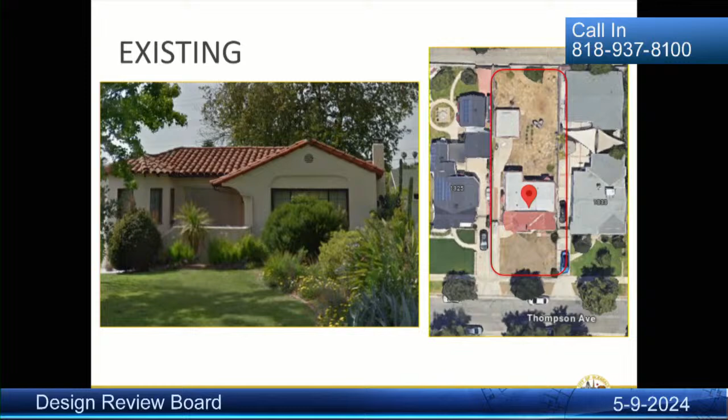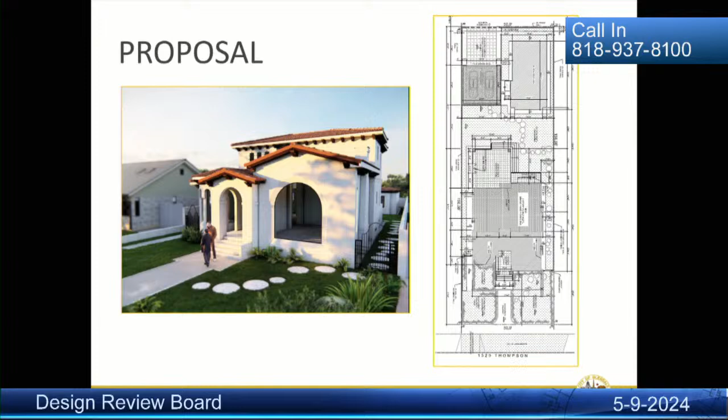Okay, the applicant is proposing a new two-story, 2,348 square foot single-family dwelling with an underground basement, a detached two-car garage that will be accessible from the alley, and a new detached 675 square foot accessory dwelling unit. The house is designed in a Spanish Mediterranean style, and the ADU and the garage are accessed via the alley at the rear.

Taking a look at the first floor plan, it features a dining room and living room, both facing the street, along with a kitchen and a bedroom and a bathroom. There's also a 432 square foot outdoor patio with kitchen features at the rear of the house.

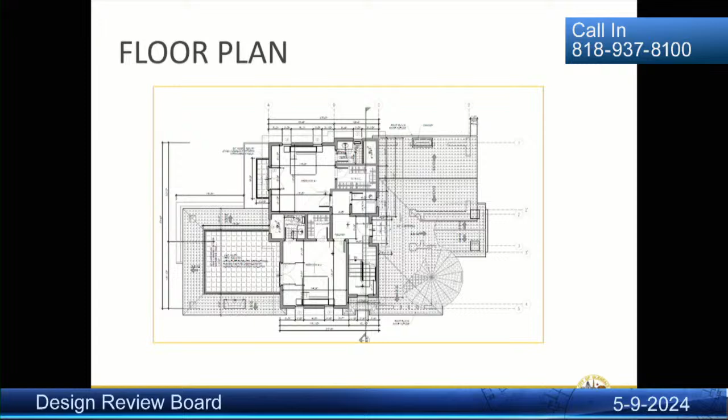And then on the upstairs floor plan, there are 2 bedrooms, 2 bathrooms, and a laundry room. There's also a 247 square foot open balcony off bedroom number 2 that's addressed in the conditions of approval. Staff believes we can reduce the size of this balcony to help with reducing the overall mass of the project.

All 4 elevations are shown on this slide. The design and detailing are consistent with Spanish and Mediterranean architectural styles. They have a low-pitched clay tile roof, rounded windows, and wood corbels. The project, including the ADU and the garage, feature white-colored smooth stucco and a red clay tile roof in keeping with the architectural style. The overall massing of the primary house could be reduced.

We believe that by pushing in the second story on the sides and at the rear, we could reduce the massing. While the second story is appropriately pushed back from the front, you can kind of see on the facades here, it's sort of massive from the sides. The mass and scale could also be improved by redesigning the front facade to reduce the amount of dominant architectural features. The front currently has a curved window, an entryway gable, and a rounded window that sort of overwhelm the focal points, and staff has included a recommendation to address this.

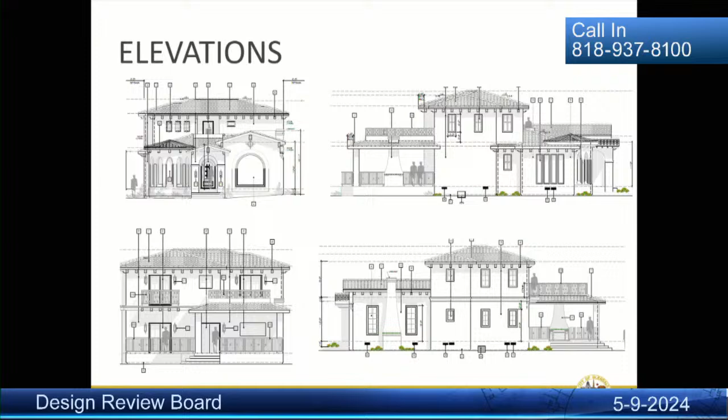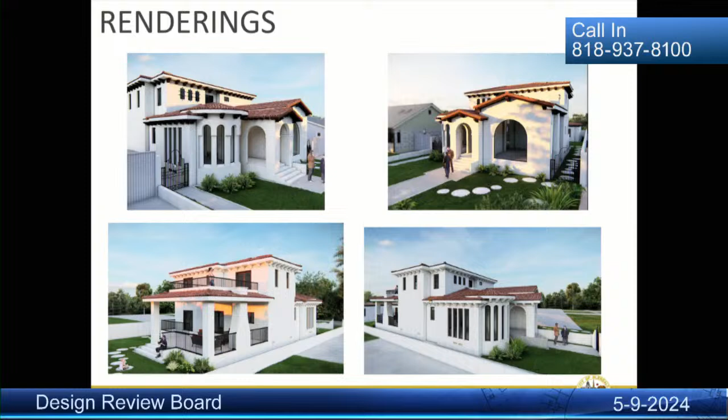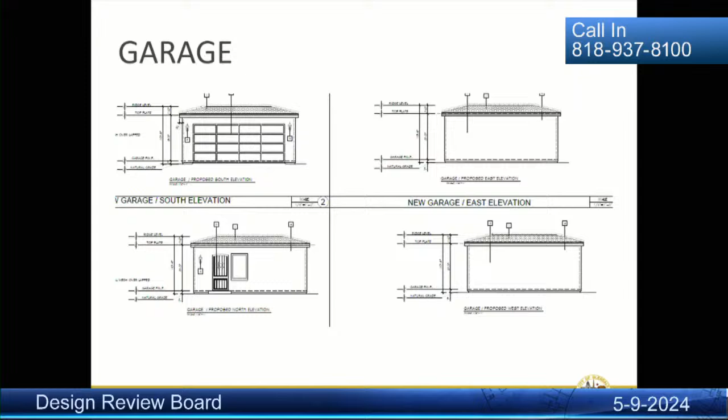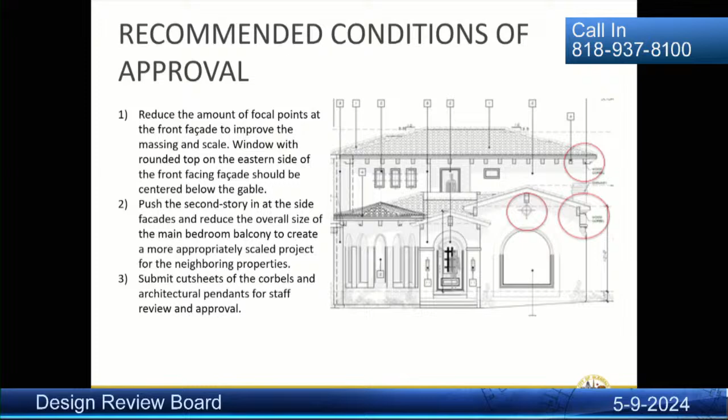Staff is recommending approval with a few conditions. One would be to reduce the amount of focal points at the front facade to improve the massing and the scale. The window with the rounded top on the eastern side of the front-facing facade should be centered below the gable, which it looks like it is now, but in a previous version it was not. And number 2, push the second story in at the sides and reduce the overall size of the second story bedroom balcony to create a more appropriately scaled project for the neighborhood. And 3, to submit cut sheets of the corbels and any architectural pendants for staff review and approval. I did not receive any public comments, and that concludes my presentation.

Very good. Thank you, Ms. Kuffel. Okay, any questions for staff? Yeah, go ahead. Thank you, Mr. Chair. In regards to the basement, what's the mindset behind it? How did it come about? It's always been a part of their proposal, and my understanding was just for storage, added storage. Is it part of the existing conditions, or this is new? Does the house basically now have a basement? I don't know that the house now has a basement. I don't believe it does. Okay, we'll ask the applicant. Okay. Any other questions?

Okay. All right, so we will open the public hearing. First up is the applicant, Arthur Israelian. Please state your name for the record. Arthur Israelian. Good evening. This is our company project. When I took this job, I took more responsibility for the project because I'm living in that area, 2 minutes walking. Every day I'm walking over there. The neighbors know me, and I believe I cannot fail with this project.

We tried to achieve with this design to complete the needs of my client. They like the Spanish style. They asked for the design in the Spanish style. And in our neighborhood, there are a lot of Spanish houses in El Miradero. On the next street, there's a couple of nice houses. I'm walking every morning in that area, checking whatever we have in the city. The project, I believe, became nice. There's some comments from the staff. We can work a little bit more, but overall, I believe we achieved whatever my client asked and whatever our goal was.

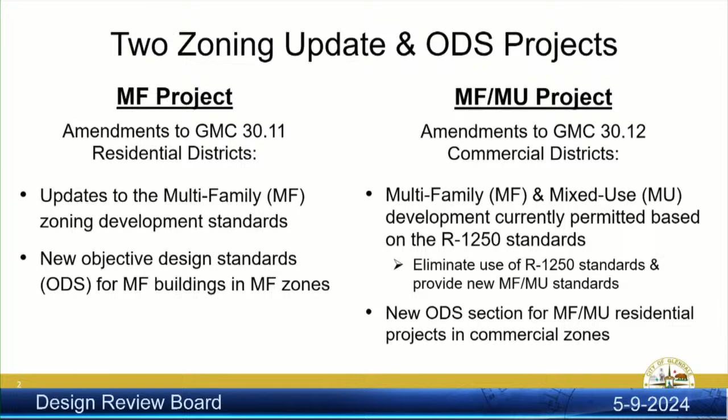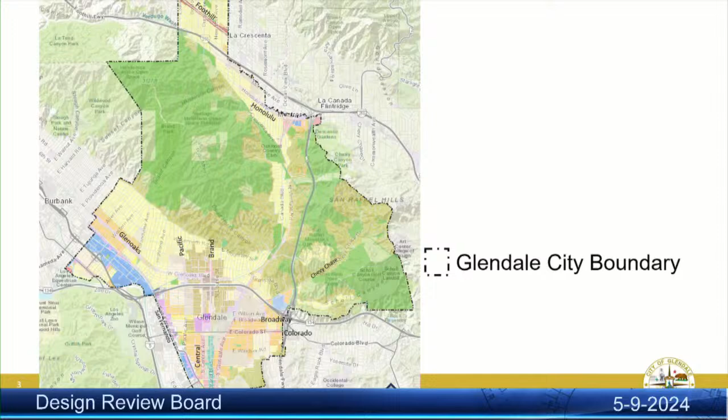The slide before you provides context where the new standards would apply. This is the map of the city showing the multifamily residential neighborhoods in gold and the commercial zones along commercial corridors and centers in red. These zones we're discussing this evening are located along major streets such as Colorado, Broadway, Glendale Avenue, South Central Avenue, and parts of Glenoaks and Foothill.

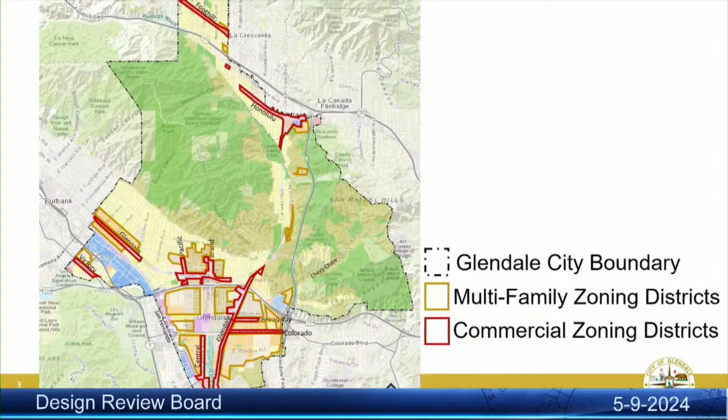The multifamily residential projects, new site planning and massing and scale concepts were presented to City Council in November, stakeholders at the end of the year as well. And the actual draft code language for the multifamily project was presented to the DRB back in February. And then we had a meeting with the local architects group shortly thereafter for their comments as well, as directed

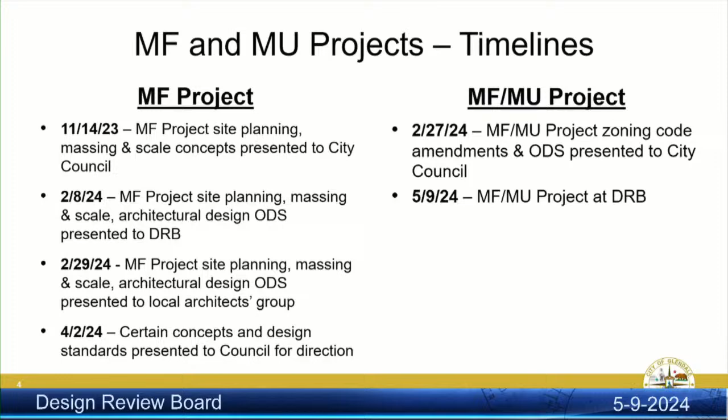by the DRB. Now, the mixed-use project, the MFMU project, the proposed code amendments were presented to council at the end of February, and comments and concerns raised by the DRB and the architects group on the multifamily project were presented to city council in early April. So that is when council provided additional direction that applies to both projects. And today's presentation focuses on the commercial districts.

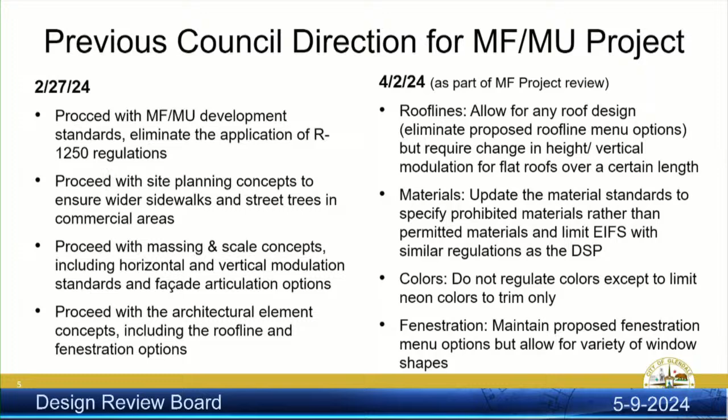fenestration. So council's focused review of the certain objective design standards in early April resulted in direction for the mixed-use project in terms of roof lines, materials, colors, and fenestration, and staff will be discussing these topics in great detail later in the presentation. So we'll leave that for now.

As noted also in the multifamily residential project, these code amendments were directed as part of the SB2 grant program, and staff has been working with Crandall Arambula to update the commercial zoning standards, and this would be to streamline residential and mixed-use development in commercial corridors and centers. Note that Crandall Arambula also prepared many of the same concepts and diagrams being presented to you today.

Okay, these updates are vital since current commercial standards only allow for multifamily residential development in commercial zones based on the existing R1250 high-density standards. These standards, the R1250 standards, are intended for traditional multifamily residential neighborhoods. They've proven to be too stringent and restricted residential and mixed-use development in commercial zones.

The very few mixed-use projects that we have had developed over the last decades, and there are very few of them, have required numerous variances from the R1250 standards or have had various concessions and waivers for those that featured affordable units and density bonuses. Proposed updates would eliminate the application of these R1250 standards, provide new standards, and obviously incorporate objective design standards.

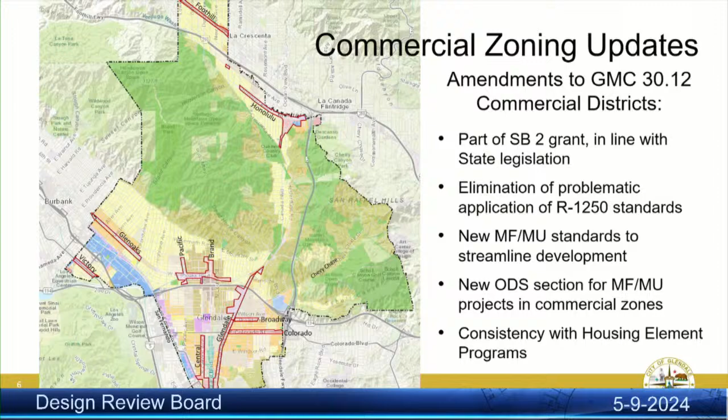And this work is part of the community development's efforts to create an improved entitlement and streamlined review process. So this would increase the certainty of multifamily and mixed-use development in commercial areas. We'd be removing the current CUP requirements and standards that require variances and ensure livability and design compatibility in commercial areas as well. Last but not least, the updates are in line with recent state legislation requiring that all design standards be objective, measurable, quantifiable, and it also fulfills certain housing element programs as highlighted in detail in your staff report.

So this slide addresses the first half of the project, which would be updates to the development standards. Currently, multifamily projects, and as you know, multifamily residential portions of mixed-use projects have to comply with all of the R1250 standards. So no changes are being proposed in terms of density. It's going to remain at 43 units to the acre maximum for lots greater than 90 feet.

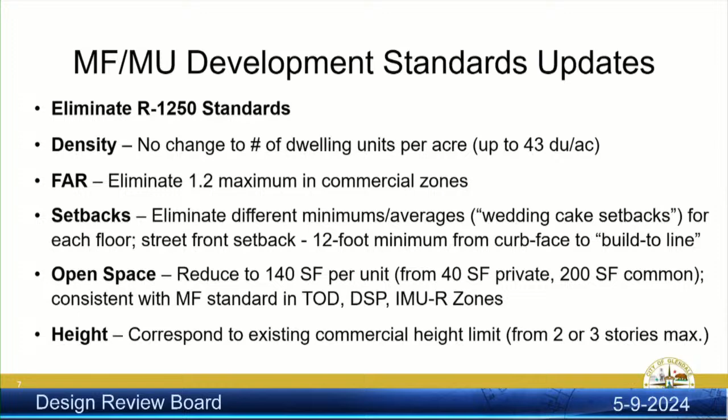Other standards to be updated to be more in line with typical mixed-use developments, such as lot coverage, setbacks, and open space. And meanwhile, the current R1250 height limit right now, 2 stories or 3 stories, depending on the lot width, that is being eliminated, and the height limit would then fall to what is the current height limit in the applicable commercial zone. So whatever the height limit is that you would be allowed for any commercial project would be the height limit that would be allowed for a mixed-use project as well. With that, I'd like to turn the PowerPoint presentation over to Teresa to continue with the actual objective design standards.

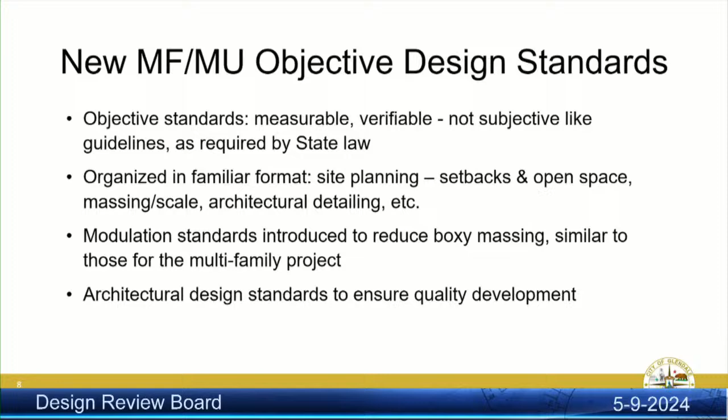Thank you, Vilia. So this project does have a few overarching goals. Vilia touched on the recent state legislation that requires that any new development standards be objective, quantifiable, and measurable. So that is the first goal with this project. We also sought to ensure that the way the ordinance was structured was going to be something that was within a familiar format. So the way it's been organized is to address site planning first, and then moving on to massing and scale, and then finally touching on the architectural elements. The new objective design standards are drafted to ensure quality development that's articulated and not overly boxy by requiring modulation both horizontally and vertically, as well as articulated facade elevations.

So moving right into those site planning standards, the site planning updates really focus on the elimination of those R1250 residential standards. So while the R1250 does require a minimum 20-foot landscaped front setback, there are essentially no front setback requirements in many of the commercial zones, and projects can be built basically at the front property line. So in some cases, that would be as close as 7 feet to the curb face.

The new standards are actually focusing more on the pedestrian realm, and this is consistent with the Tropico TOD standards that were approved last year. So the new setback would actually be a 12-foot dimension from the curb face to the wall face to create a nice pedestrian realm. This would allow for accessibility and street trees as well. That 12-foot standard would apply at the ground floor. Stories above the ground floor could potentially go up to a 10-foot minimum setback from curb face or to the property line, whichever of the two is closer to the street.

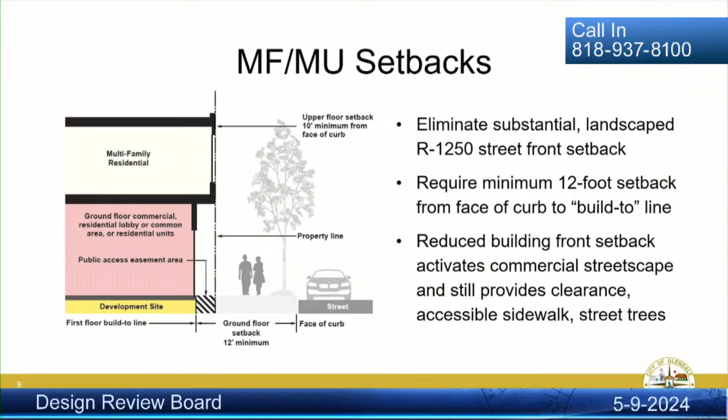Then moving on to our massing and scale section, you may recall the horizontal and vertical modulation concepts that we discussed in the multifamily project. These standards aim to reduce the bulk of buildings, avoid massive boxy structures, and provide transitions in height between new and existing buildings. Horizontal modulation is going to be a new definition. It's defined as variations across the facade, such as recesses to break up the horizontality of a building into defined building segments. Whereas vertical modulation refers to variations in heights, which could be achieved by creating a step back of the upper stories of a building.

The vertical modulation standards require greater transitions in height when a project is adjacent to a residential zone or is located on a sloped lot. Massing and scale standards also include facade articulation regulations, which introduce architectural elements that help to break down large segments of building facades into smaller scale segments. And the facade articulation standards feature a new menu of options, which we'll go over later in the presentation.

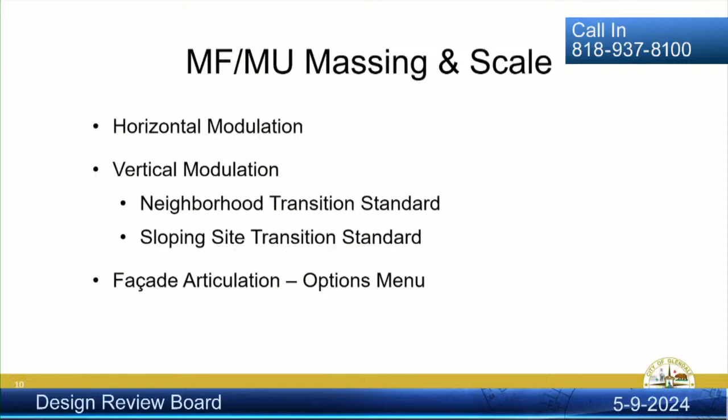So here we have our horizontal modulation. The horizontal modulation concepts require that building facades be broken into segments. Here in the commercial zones, any facade that is on an elevation that's greater than 90 feet in length would be required to have a recess so that it would be broken into 3 segments. The recess segment would be required to be a minimum of 40 feet wide and a maximum of 60 feet wide and have a minimum depth dimension of at least 10 feet.

The horizontal recessed modulated facade is required to go at least from the second story to the top of the building. It is allowed but not required at the ground floor as well. We are encouraging it at the ground floor, but in a mixed-use project with a commercial or retail use at the ground floor it may not always be appropriate.

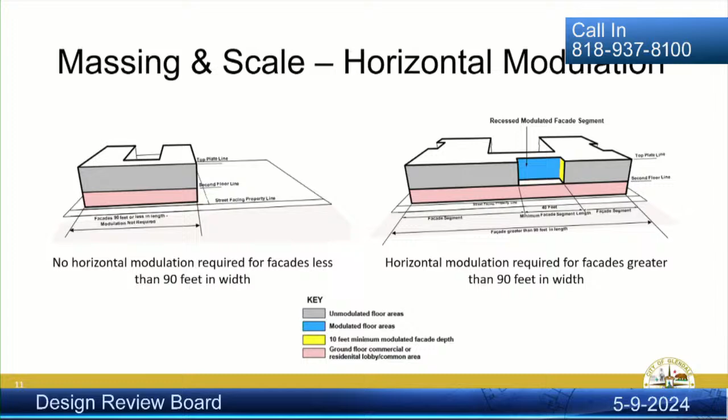Vertical modulation provides that height transition. We can see in this graphic it's stepping back. The modulation reduces the top of the building. It also reduces shade and shadow onto adjacent properties and public sidewalks. The vertical modulation standards would apply when a multifamily or mixed-use development is greater than 45 feet in height. At that point, the top floors would then have to be set back 10 feet from the front elevation and 5 feet from all of the interior elevations.

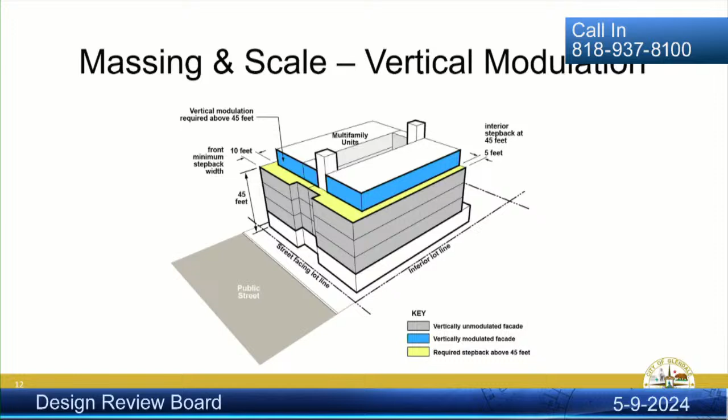And then when a project does abut a residentially zoned property, additional setbacks and stepbacks apply. So a 10-foot setback at the ground floor would be applicable, and then above the second story, an additional 10 feet with a step back.

We also are going to be... Quick question. Yes. Residentially zoned property, would that be including single-family zones? Yes. So it doesn't matter whether it's multifamily or single-family, it's just the one 10-foot setback? Correct. Okay, because some of these C zones do abut single-family neighborhoods, yes? Yes, they do. Sorry, just 1 second. Oh, okay. Vilia is going to be verifying the exact wording in the ordinance, make sure that that's accurate information, and we'll get back to that.

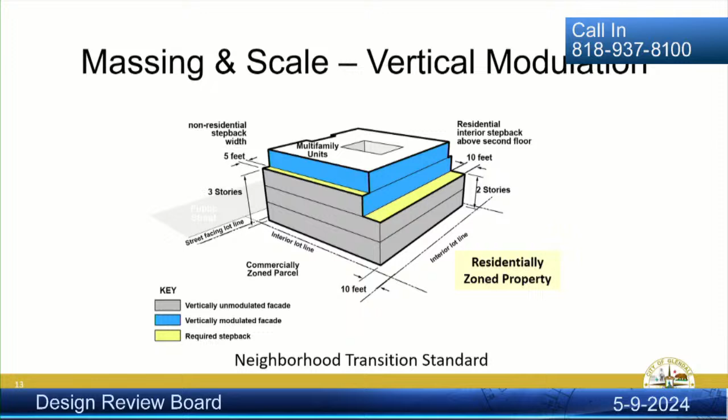Also want to point out that there will be additional standards, transition standards for sloped properties, like you might find along Foothill. We don't have a graphic to demonstrate that just yet, as that is getting lined out. So moving on to our massing and articulation modulation. The objective design standards provide a variety of facade articulation options.

These are similar to the options that you saw with the multifamily project in February. New projects will be required to incorporate at least one of these facade articulation options onto each elevation of the project. Architects and designers can choose from these options. They should be adding visual interest and help to reduce the massing of the building. And we're going to go over each of these options with some real-world examples. We also have a couple of additional options that have been generated since our meeting in February, and so we'll be showing some examples of those as well.

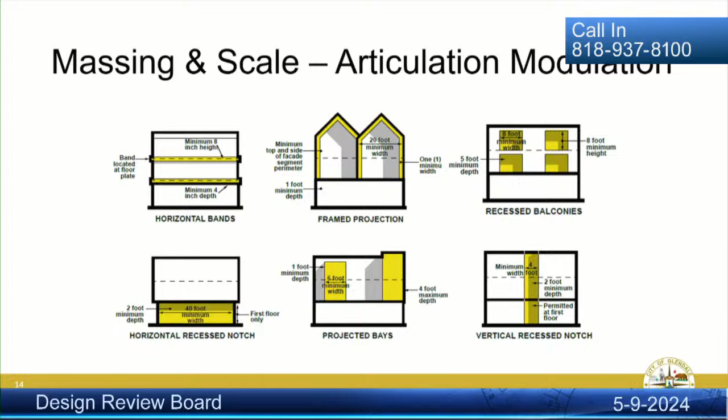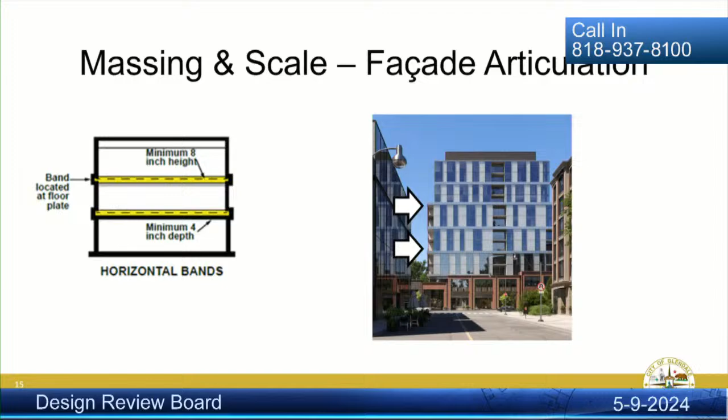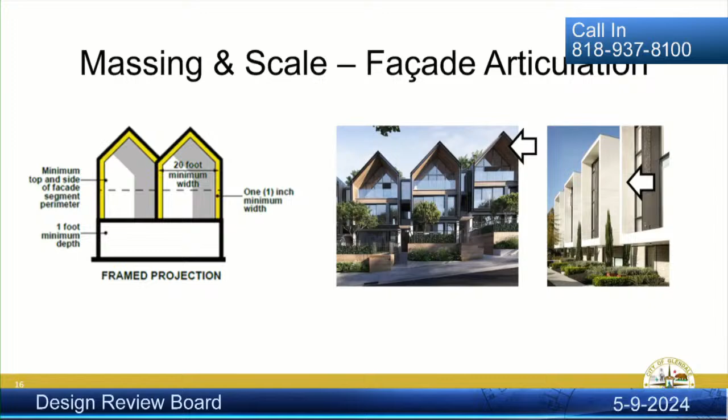So first, we have our horizontal bands. Horizontal bands help define the floor plates of a building and accentuate horizontality of a building. Then we have our framed projections. We can see a variety of shapes in these images here. Framed projections would essentially be framing the top and sides of a building facade to break it into more rhythmic segments.

And we have recessed balconies, which provide some depth to those building facades. Now, the consultant specified that recessed balconies can be used as an articulation option, but we also have a provision in the new ordinance that would allow for balconies that are not one of those options that could actually project from the building face, as long as it's not projecting over any public right-of-way area.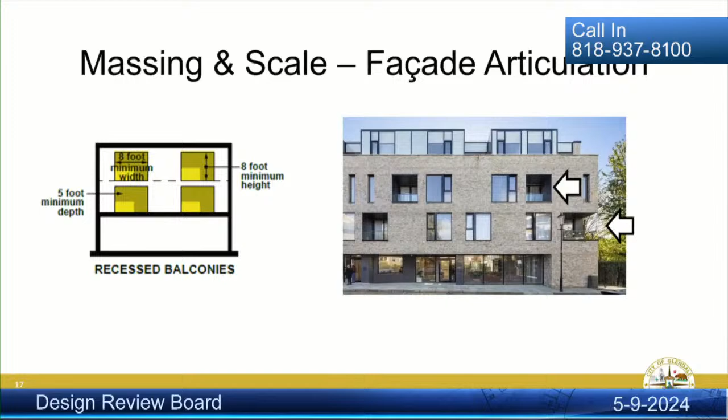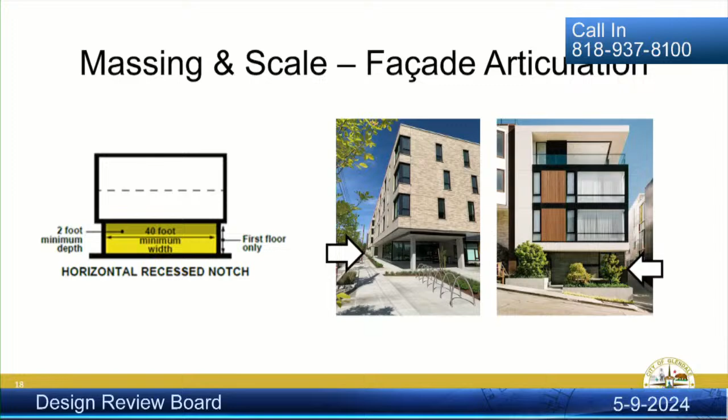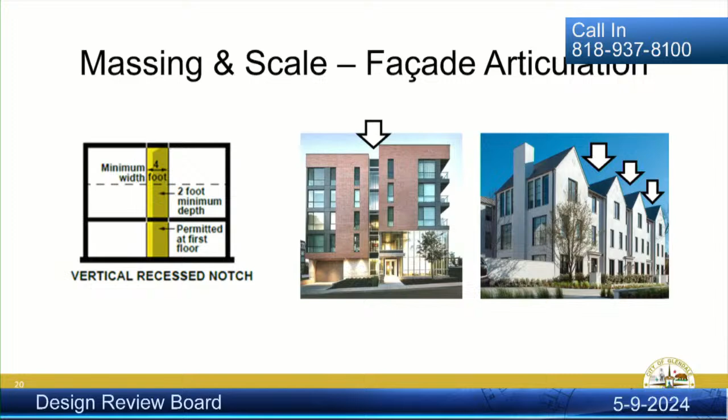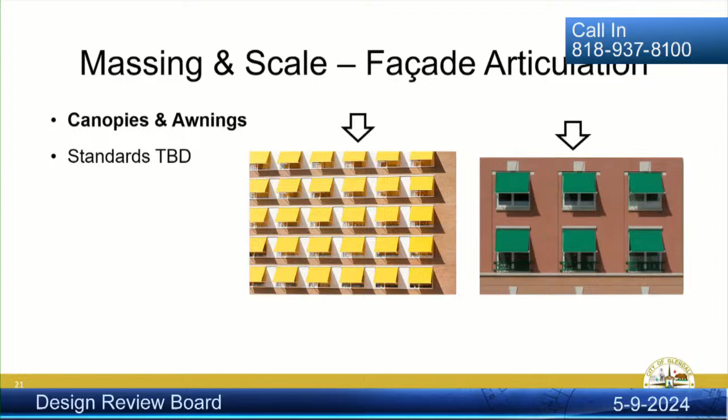Vertical recess notch features a recess that goes through all of the stories of the building and provides kind of a break across the building elevation. Vertical recess notches are not required at the first floor, but they are permitted at the first floor. And some of the graphics to be drafted would include canopies and awnings on the upper stories of a multifamily or residential mixed-use building. And finally, we also will be adding graphics for brise soleil, which would add an interesting geometry to the building facades as well as provide passive cooling to the buildings.

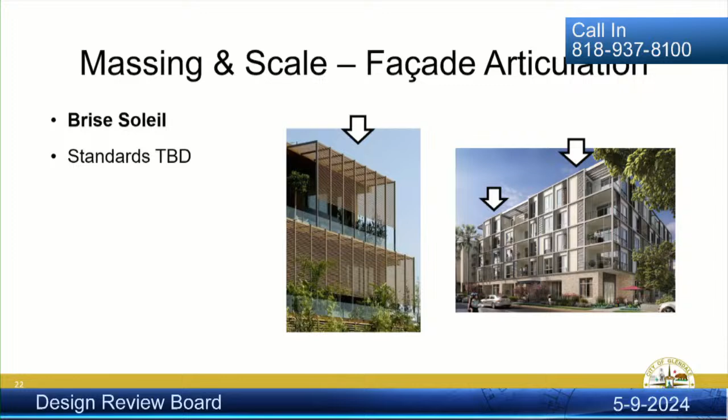Another main subsection of the objective design standards is architectural elements. This includes standards related to vents, gutters, downspouts, as well as materials and colors of facades, roof forms, and balconies, as well as fenestration options, canopies, things of that nature. DRB and a group of local architects provided a lot of input on some of these particular items. And we presented that conversation to City Council and did get some feedback from Council, which is noted here in red.

So particularly with the primary facade, the materials list has been updated so that it lists only prohibited materials rather than permitted materials. It also has updated the limits on EIFS to be consistent with those found in our downtown specific plan. The direction from council was not to regulate color, with the exception of limiting neon or fluorescent paint colors solely to trim elements on a building.

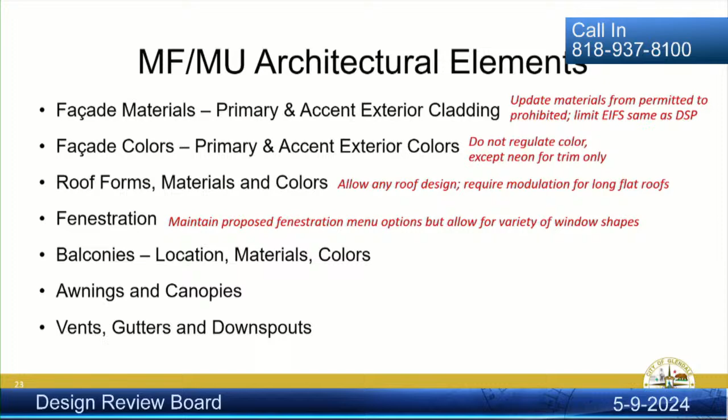Council also concurred with DRB and with local architects to not restrain roof design. And so the ordinances have been amended to allow for any roof design. However, there would still be a vertical modulation requirement for long, flat roofs. And finally, again, concurring with the recommendations of DRB and the local architects group, the fenestration menus will allow for any type of window shape and not be restricted to just rectangular window shapes.

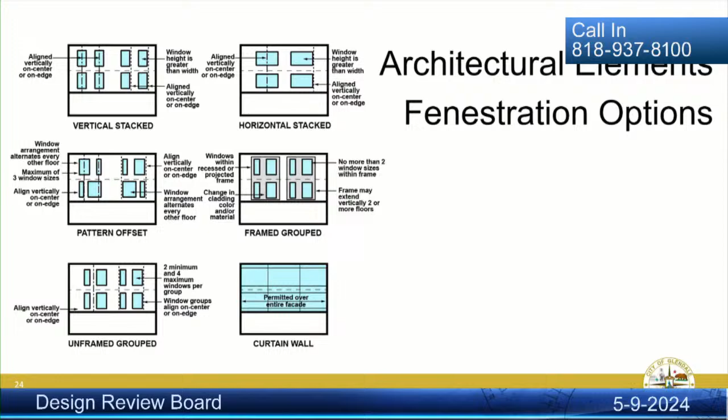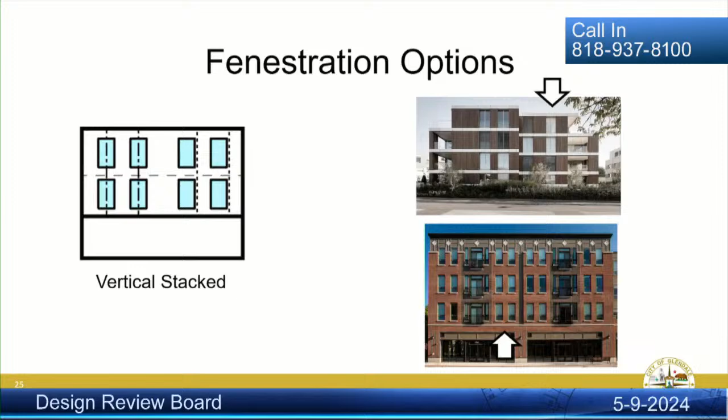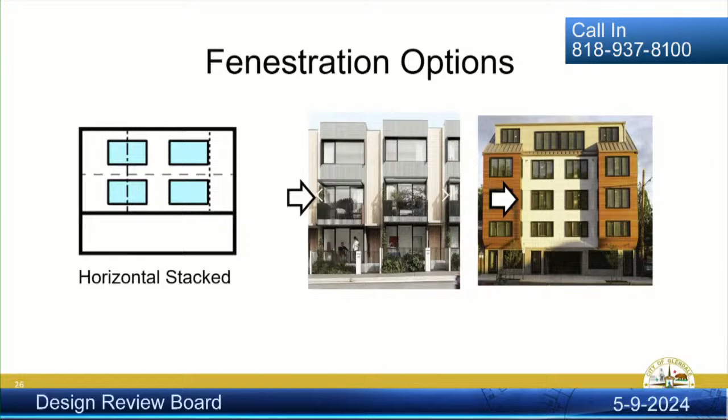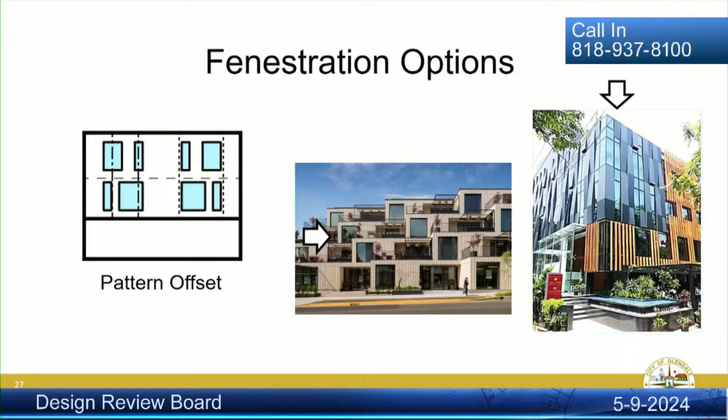And so looking right at those fenestration options, we have the vertical stacked option, which is when the window height is greater than the width. Those types of windows could be aligned either on center or at an edge. Horizontal stacked is basically when the window is wider than it is tall, and the alignment would be very similar, either on center or on an edge. We have pattern offset option, which would allow for window arrangement to alternate rhythmically every other floor of the building. And then the curtain wall features a wall of windows that can span multiple stories.

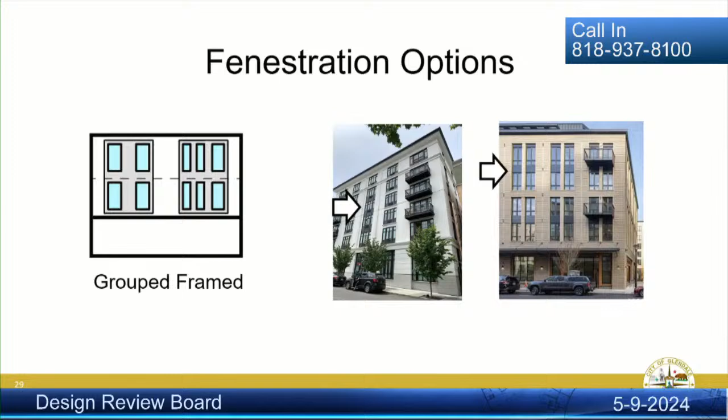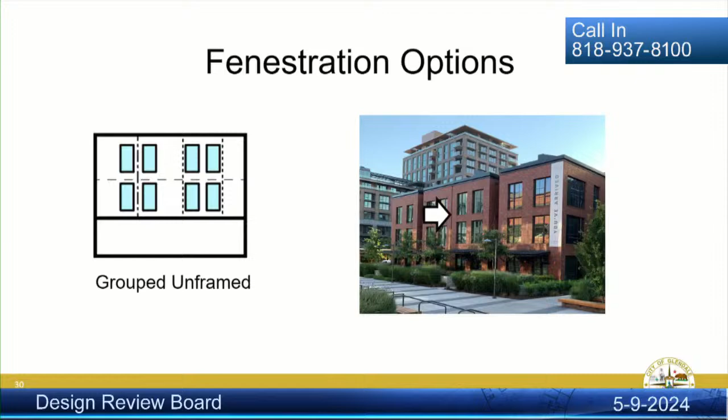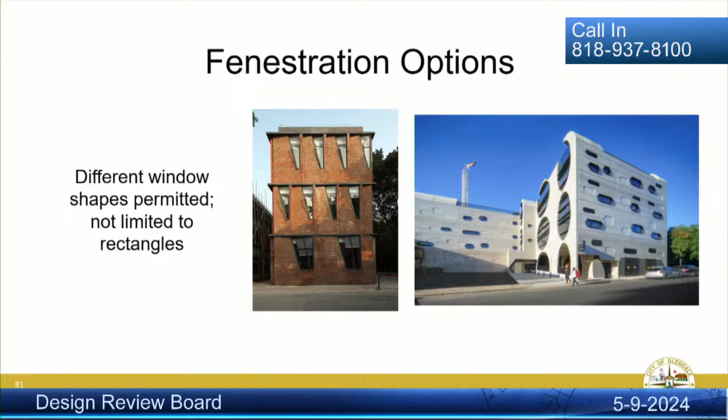Another fenestration option is the grouped framed window design, in which windows are kind of set within a frame that would extend over more than one floor. Oftentimes the frame would be offset from the building and then have a distinguishing feature such as a change in material or a change in color. And then grouped unframed features a grouping of windows that are not set within a frame. And just to note, those different window shapes will be permitted and will not be limited to rectangles. We found some interesting options.

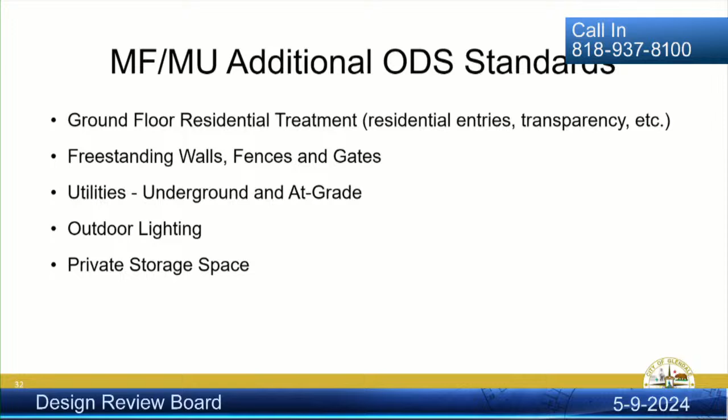Finally, the objective design standards concludes with standards that are going to be related to ground floor residential treatments, distinguishing entryways to the residential from any commercial area, as well as facade transparency at the ground floor. The regulations also touch upon freestanding walls, fences, and gates, outdoor utility location, outdoor lighting, and residential private storage space. And Villia is going to take it from here.

So, we have come to that part of the presentation where we are looking to the DRB to provide feedback on a number of these concepts and development standards. The first being the actual development standards themselves, with the elimination of the R1250 standards. Staff is proposing to eliminate the 1.2 FAR. And again, when we refer to FAR, we're referring to the floor area ratio.

This would be essentially the total amount of floor area divided by the lot square footage. So for instance, a 1.2 FAR would essentially be if you had a full 50 by 150 lot, 7,500 square feet, you'd probably be getting around a 9,000 square foot building, roughly arranged on maybe one and a half stories, if that is possible.

We feel that elimination of the floor area would get these mixed-use projects to a level of density that is permitted by right, and it would still be consistent with the building envelope that would be allowed for any other type of commercial building. So you're not changing the massing, you're just basically allowing for development potential to be increased, what you would normally see, that is.

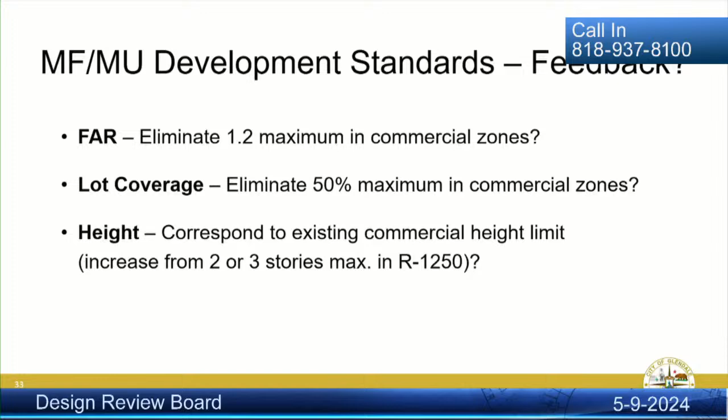Lot coverage, right now, R1250 is at a maximum 50% of your lot. This would be pretty standard for traditional multifamily residential neighborhoods that have great landscaped front yards, landscaped side yards, open spaces at the rear. In this case, because this is a dense urban environment to begin with, and these are located along commercial streets that have active transportation available, people are walking and whatnot, in an urban environment you're not seeing a 50% lot coverage in this type of context.

And so staff is proposing to eliminate that. It is up to the board and your feedback whether to do so, or instead perhaps limit it to a specific percentage that is greater than 50%. And last but not least, staff is recommending that height be allowed to go to what is permitted for any other type of development in the commercial zone.

So for instance, looking at the C1, and this was part of the proposed ordinance included in your staff report on page 7, the maximum height in a C1 zone is 25 feet. That is not changing. So any type of residential or mixed-use residential project in the C1 zone would remain at 25 feet.

C2, that goes up depending on which district you're located in, whether it's 35 feet or 45 feet. C3 is the more intensive commercial zone, so that goes up to 50 feet in District 1, 65 in District 2, et cetera. So again, we're just proposing to have it consistent with what is permitted by right for commercial buildings.

Next, and I'm not sure if you'd like us to pause here to get your feedback now, or if you'd like us to run through the rest of the feedback slides and then pause for your feedback in general. I do know that we have some public comments as well, so if you'd like to hear that prior to providing your feedback, that would be up to the board. So how would you wish? Yeah, I think we can all make notes, but since we have callers, we should go through the presentation, allow them to give comments, and then we can weigh in. Great.

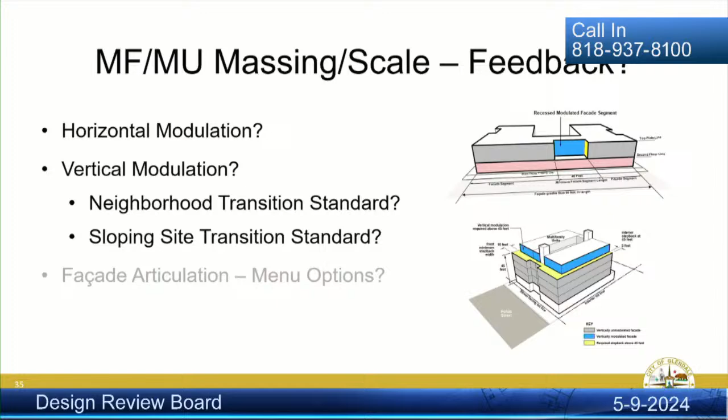Sorry, a question about the modulation. Is it limited only to the street-facing facade, or when it's over 90, if it's interior, it's also? Just to the street-facing facade. Okay. Correct. Just to the street-facing facade. Oh, I see, this is street facing. Yeah, but then you look at the sides, they're modulated, but if it's interior. Yeah, I know. It's hard when you show me visuals. Yes, I know, and that is the unfortunate thing, because these diagrams have not been modified. But we will finalize the diagrams for the final draft as well.

Okay. Next up would be the facade articulation, the menu options. Council directed staff to move forward with the menu options for the articulation of facade modulation. Does the DRB have any other recommendations? Do you like the brise soleil and the awning options as additions to this menu option? Do you have any other possible options that staff has not yet considered that you would like to include? This is up for feedback. Chair Pro Tem, go ahead.

By the way, I thought the imagery that staff had provided was excellent. The examples that are being depicted for the language of the windows, the banding, the balconies, everything that you're describing, which is just so hard to depict, I thought your imagery was great. We could tell you've been working on it, because that just is really amazing. So, yeah, the brise soleil and the awnings are all good features to allow, because they will be used creatively by architects.

Just so we could understand, though, I felt as though you were alluding to that these standards don't have undulation or articulation on the interior sides of a commercial development, and that's why the increased setbacks were being proposed. So am I understanding that correctly, that, let's say as depicted on page 19, this undulation and articulation is really only for the street side, but as proposed here, the same wouldn't apply on the interior setbacks, is that correct?

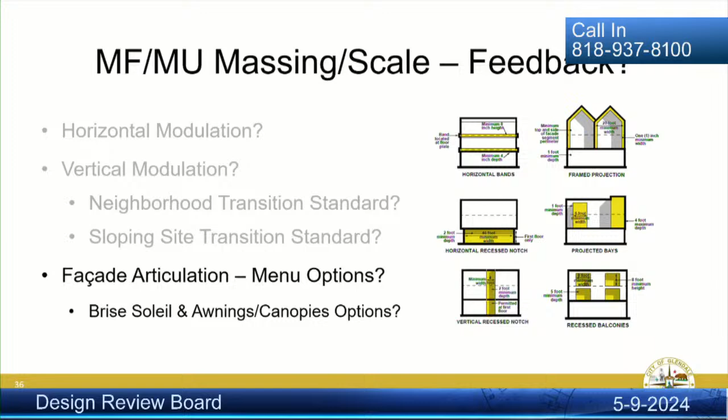Last but not least, the articulation elements. So, now these were based on council's direction at the April meeting. Fenestration: council directed staff to proceed with the fenestration options. I know that the DRB and the architects group sort of said, perhaps we don't need to regulate windows. The building code regulates egress, ingress for bedroom windows and things of that nature. Council heard that and ultimately directed staff to proceed with the menu options.

We provided images and hopefully those were sufficient to show you that there is a variety. They're not going to be limited to single rectangular windows, and so there would be options in terms of shape. Roof forms: council heard you, the DRB and the architects group. The menu options regarding the pitched and flat roofs have been eliminated for roof line. And the only requirement would be that long, elongated flat roofs over a certain length, which is yet to be determined, would have to be modulated so that you don't have just a long, flat 250-foot roof line. Yeah, makes sense.

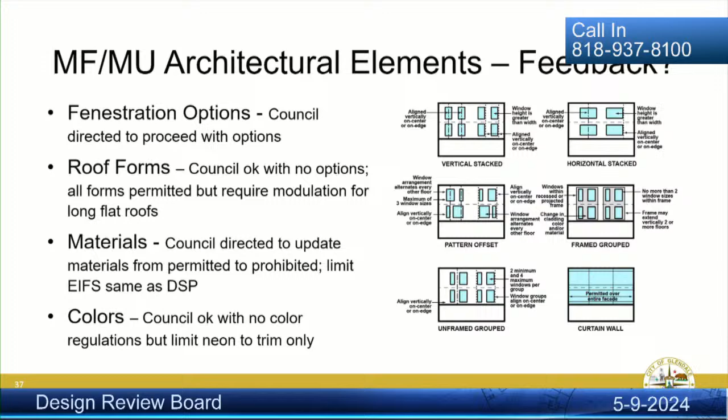I have a question, though. Yes. So as far as the common open spaces, and I know we're calling common open space something else now, but that's what I'm referring to. One of the images illustrated a reduction to 140 square feet. There was a lot of discussion with the multifamily standards as to where that should be placed, if it's going to be placed in the first 80% and whatnot. We had a lot of discussion about that with the architects group as well. Where is it being proposed to be placed here? Are there any restrictions, or could you place it anywhere you want?

So the multifamily regulations were very different because there was a new concept being proposed of the common open space amenity area, the COSA, that was breaking up the building. And because of that, the open space was sort of regulated in regards to that COSA. In this case, because this is a very urban context, there are no limitations, whether it be a balcony or a rooftop deck. This is a streetscape, urban context, and it would be consistent with other mixed-use residential projects.

So it could be 140 per unit, let's say on the roof deck, or it could be 140 square feet of private balcony per unit. It just depends. Correct, and so it would allow the maximum flexibility for the architect in terms of its open space. The only thing is there are regulations regarding balconies, if they're used as a facade articulation option, which is one of the options on the menu list.

Those have certain regulations in terms of, a portion of it has to be recessed, there's a maximum projection. So there are minor regulations regarding balconies for private open space, but otherwise there is no limitation in terms of where is it located on a lot, where is it located on a building facade. That's definitely in the right direction.

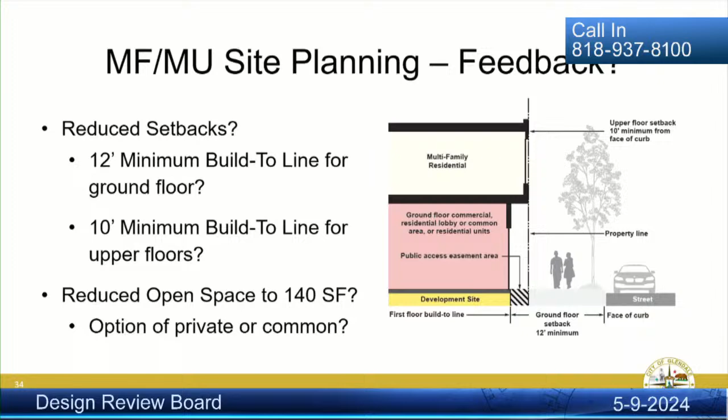It was not significantly amended, except that lots that are larger than 90 feet in width could potentially split the COSA into two areas with a rooftop deck and a ground floor COSA, but the minimum dimensions were going to be maintained. Okay, thank you.

And just before, we do have 2 slides, so I just don't want to forget them at the very end, but we have 2 community meetings regarding the multifamily and the mixed-use ordinances. We have an in-person meeting scheduled for Wednesday, May the 22nd. This is in person at the Sparr Heights Community Center, doors open at 6:45, and the presentation promptly

begins at 7 p.m. And we have a virtual online presentation the following week on Wednesday, so that way people can join from the comfort of their living rooms for essentially the same type of presentation, and two additional opportunities to provide feedback from the public.

Okay, very good. Well, let's open up public commentary here. Mr. Durham has been very patiently waiting, so I'll invite him to come up and give his comments. Would it be all right if you take the callers first? Yeah, sure. Okay. First caller, Jacob Pierce. Jacob Pierce, you're live on the air with the Design Review Board, and thank you for your patience since you've been on hold now for over an hour. Jacob Pierce, you're live on the air with the Design Review Board. Yes, thank you.